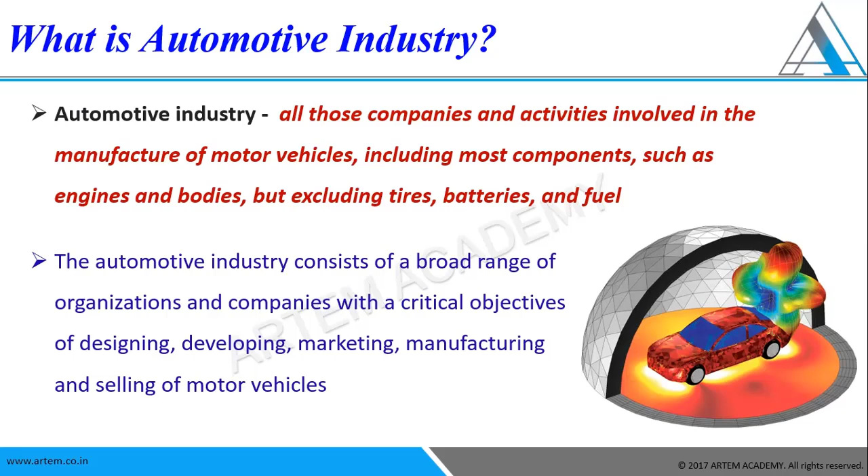Okay. So you can see here it is a broad range of organizations and companies, starting from designing, developing, that means simulation, production, marketing, sales; everything belongs to this automotive industry. We belong to design and development. If we are interested, we can be a combination of technical, marketing and manufacturing. For manufacturing, nowadays the process is done not through experiment but through simulation tools, which reduce our time and cost. Other than this, we have many other things in simulation, design, marketing, maintenance and services.

So in more sense, you can see it is a unique and challenging career for whoever is passionate about it, regardless of skill level. That means according to our skill and capability, we can choose where to go. As the automotive field has a broad range of simulations and design, according to our skill level and our interest, we have to go for the specific part or stream.

The picture you can see here talks about aerodynamics, design, simulation. In simulation, again, we have many things like strength, durability, safety, and how it is acting. So it is a combination of many parts. As mechanical engineers, we'll focus on 80% or 90% of the parts. The other 10% is for the glasses or the external architectural purpose. And these days we are also getting AI-built systems in the car. That portion is related to software combined with mechanical inputs, so we can go there as well.

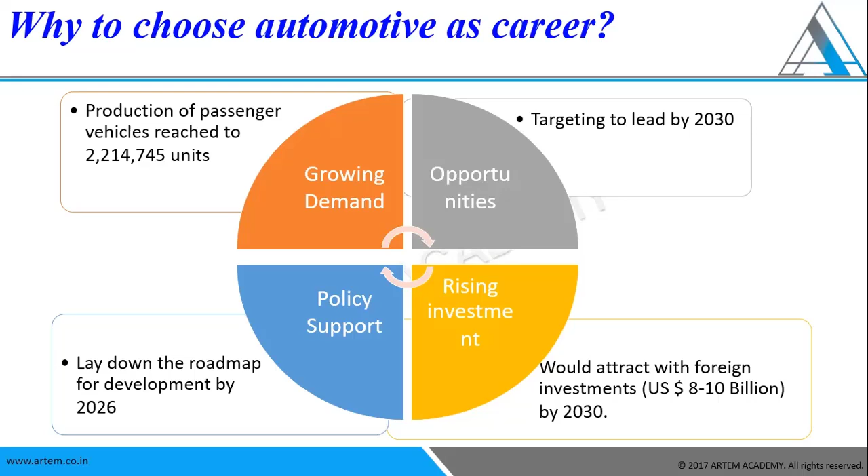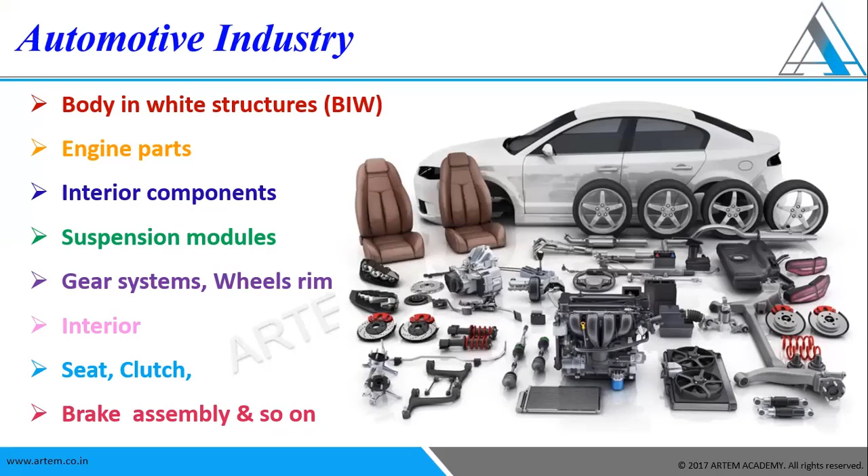In the same way, interiors, other than foam or something, even those seat structures sit on a frame. That frame will carry the load, not the foam or the seat, right? We have to design that frame according to the weight we are putting on the seat and on the back, and how the system should be designed. And the seat, clutch, brake assembly, and so on. So many components are there. Individually also we'll throw some light.

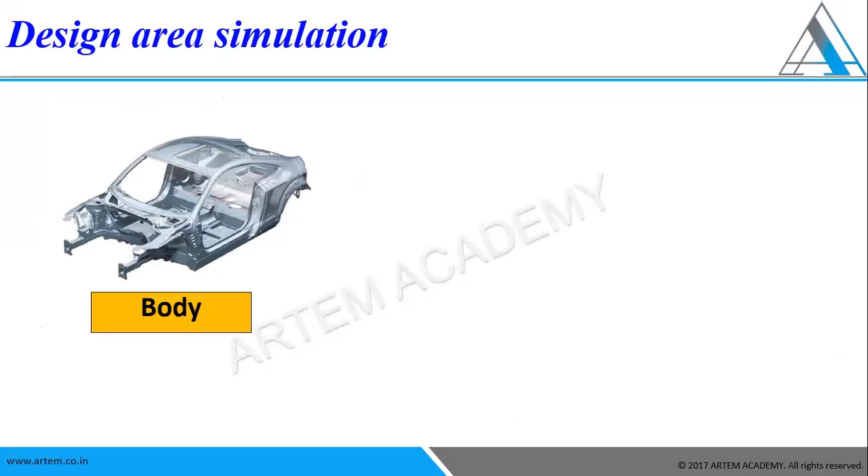Before that, we will discuss how many categories globally we need to do for any automotive industry. The major things I have noted here. We have to do the body, and then the chassis. These are the designs of the structural components, like interior. So in that again, if we take the body, about 20 to 30 sub-components will be there.

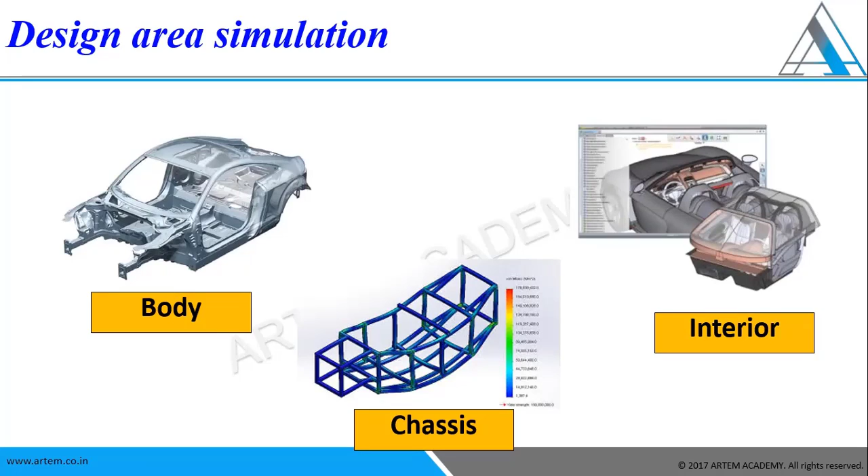Some structural examples I have given so that you will get a sense of what designs we are going to do for an automotive industry. Okay. And also in later stages, I will explain how we have to decide in which tool I have to design, and according to different analyses, which tools are available in the market and how I should go through it.

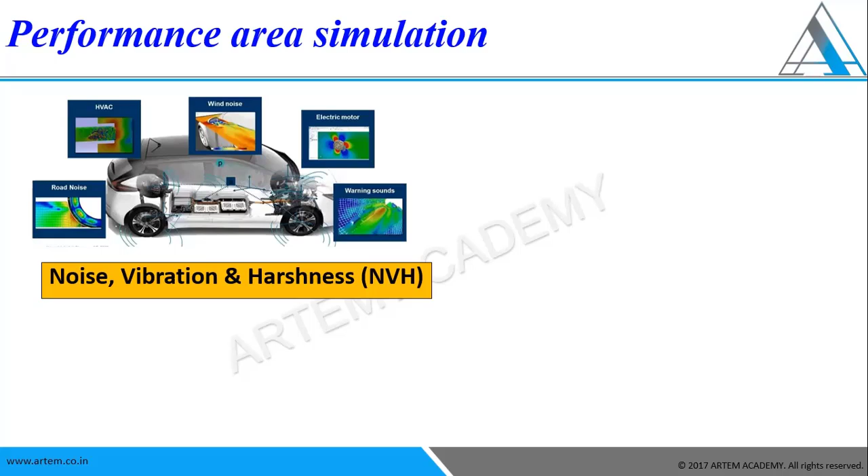Vibration because of the air, because of engine parts moving, and of weight. Different portions we are going to analyze for vibration, component wise, sub-component wise, based on the simulation, that means based on the running operating condition. Like that, we will be doing each thing; again, if you take each subject, it is a vast ocean kind of thing.

Then aerodynamics and thermal. How can we reduce drag? Any car has to move fast with less fuel consumption. That will happen by reducing the drag. If you observe sedan cars, you can reduce the drag and it will perform at higher speed. That is why we have to consider the aerodynamics and also thermal change, whether it is in cold temperatures or in high temperatures.

When we are turning a vehicle, we should observe that if both the tires are running with the same speed, the turning won't happen. For that, there should be a gear system in between the two tires, which helps to rotate or turn the system. Okay, so that is what we are going to do through vehicle dynamics.

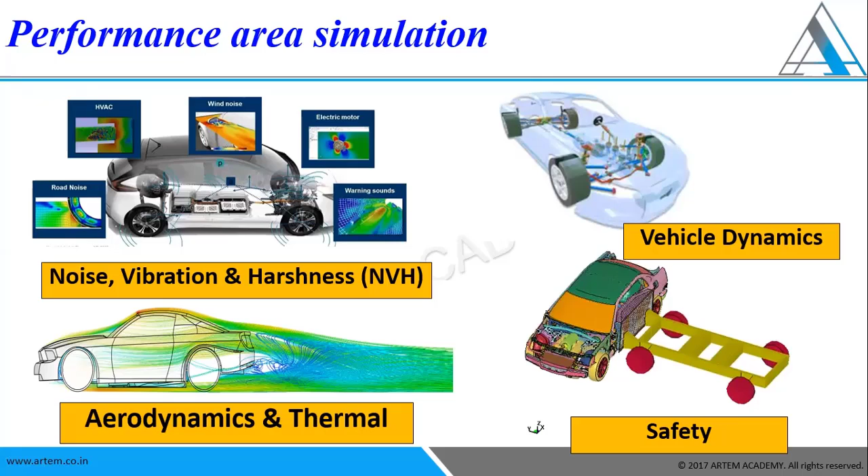Okay, these are different simulation areas we are going to address for the certification or for the manufacturing of an automotive system in terms of performance. Now let us take components based on the models. That means you can see how many models are there for a single component. If we take body in white components, that means my car body, how many subcomponents are there which get attached to form a global assembly.

And you can see for this one frame, there are about 15 to 20 components. For each and every component, we have to find the strength, durability, failure, fracture, everything before going to manufacturing. So you can see how much it got expanded. If you take one car, these many are there. Then imagine how many opportunities you will have in this automotive industry.

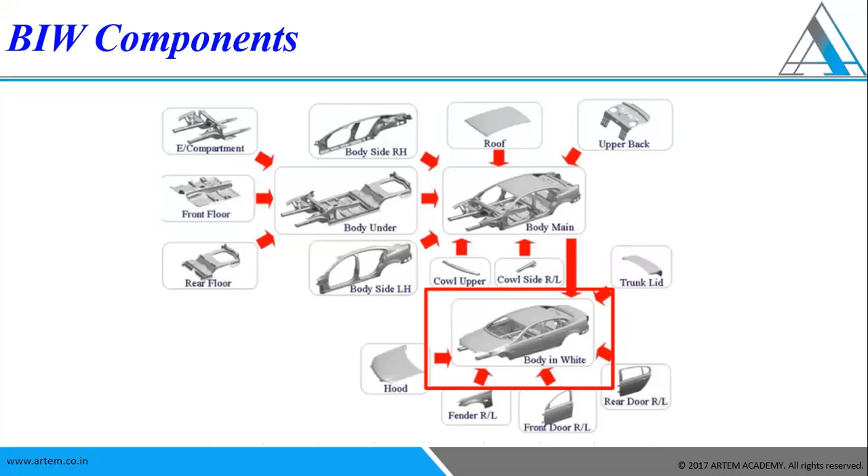Let us talk about engine parts then.

So some of the parts I'm mentioning here, like engine block, exhaust manifold, and cylinder head cover, and you also observe that some gaskets are made, that is to reduce the damping effect or to reduce the vibration in the system. So oil pan, shaft pulley, and so many small parts are there. Each need to be analyzed separately to know its strength based on the functionality.

All this we are analyzing separately, and as an assembly, we may be considering some of the components as defeatured, or for this complete assembly to run, it will take very high time and be very complex to do. That's why every time, not only in automotive but for any industry, we will be considering this part-wise, and also the complete assembly, how the functionality is working.

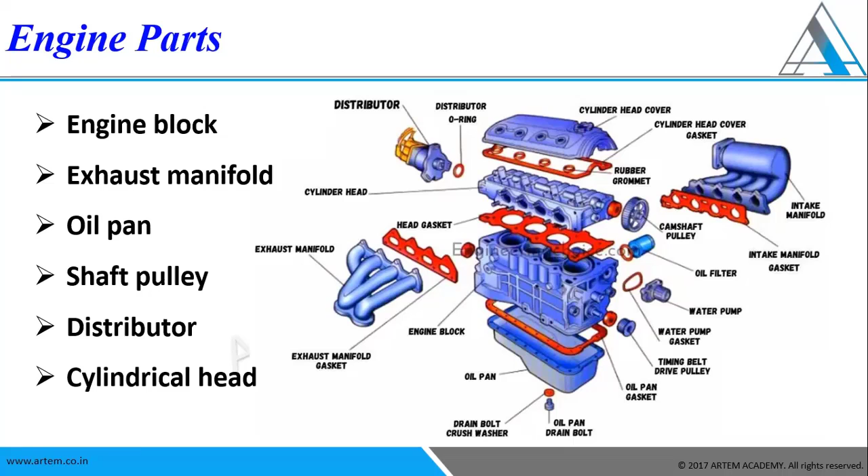Okay, here also one example I'm going to give. If we take the engine block, we need to make at least 7 to 8 types of analysis for the engine block. When I'm going to explain about the types of analysis, at that time I'll take the same example and explain to you why we need to do different types of analysis for a single portion, what is the necessity of it.

Then structural components other than this car body are the engine. We have these many structural components. These parts are mentioned and given to you so that it will give a good insight into how much the automotive industry is expanded. For each part, at least a team will be working from design to manufacturing, from concept design to manufacturing in other sense.

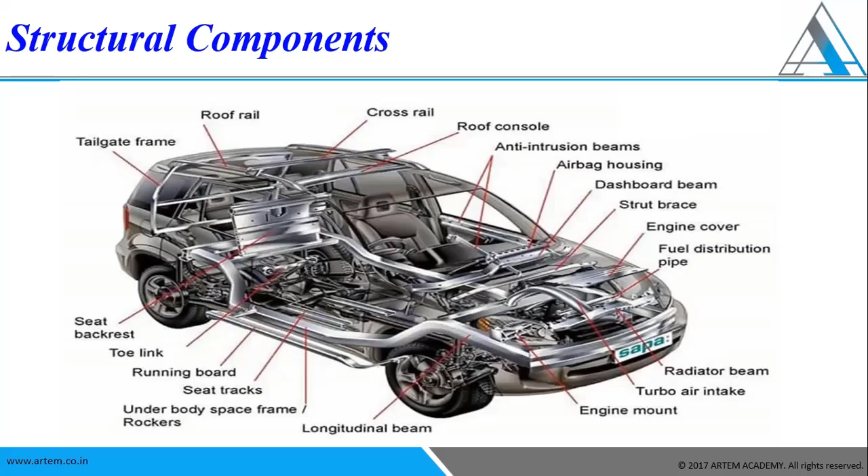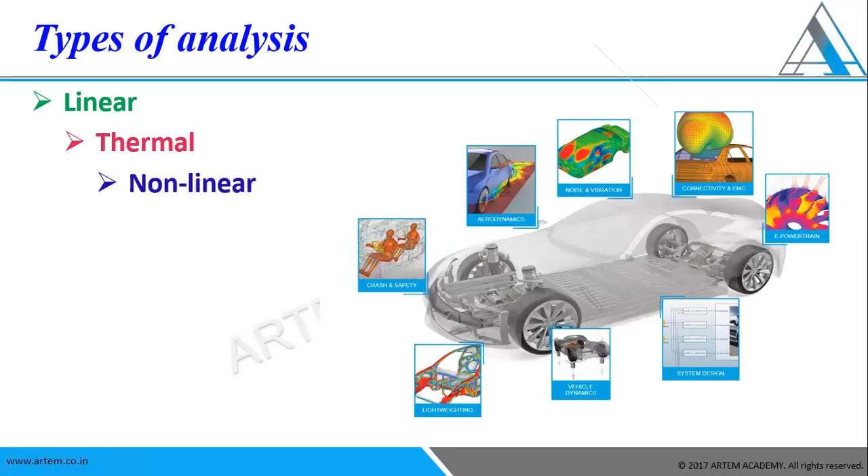For all these parts, what are the types of analysis we are going to do? Here we'll see. Some of the types I'm mentioning here. Types of analysis. Linear, that is the basic analysis to carry forward any part. And then we have these many types. I'm giving a rough idea of contact, aerodynamics, and so many other things. Thermal, nonlinear, fatigue, durability, stiffness, optimization, crash, vibration. So it doesn't mean that for each and every part, all types we are going to do. Only some I have mentioned here. Still, there are so many other types also.

So if you take a component like engine block, we need to do linear analysis. Since it is an engine block which will be having high pressures and temperatures, we are going to do thermal analysis. Then according to the speed, according to the running time, the load in the engine block, that means temperatures, pressures, will vary, right? So for that, we are going to do fatigue analysis, transient analysis, and to know how stiff it is, we have to do stiffness analysis. To optimize the part for a new material or for manufacturing, we have to do that as well.

And since it is having high temperatures and pressures, if it is crossing beyond the yield, what will happen? So we have to do nonlinear also for that. So for one engine block, which is a part of the engine, we are doing about 7 to 8 kinds of analysis for the certification. Why do we have to do it? To explain this, I'll give a simple example. Everybody might have done UTM, right? Universal testing machine, where we are going to extract the stress-strain curve.

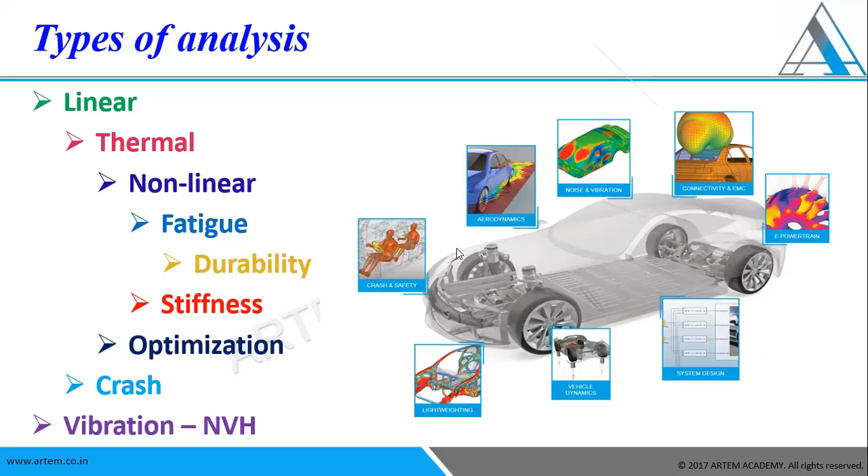I think it's clear enough. Then what are the steps for simulation? Irrespective of any type of analysis, these are the steps. We have to do CAD, that is design, and then mesh, that is nothing but meshing tool or any simulation tool, and then assembly. Boundary conditions we have to apply as per the component and as per the functionality of the component, how we are making. Okay, compute the results, analyze and test it.

Okay, so these are the steps. Irrespective of any type of analysis, these are the steps. But based on the type of analysis, geometry will vary to a little extent. Mesh factors will be different according to the type of analysis. For example, for static condition, one type of mesh I need. For modal analysis, where we are going to analyze the vibrations and all those things, I need another type.

If it is a single component of an assembly, or if we are making bigger components like a car, a complete vehicle, then so much we are going to assume, like the thick parts or straight parts we will make as 1D elements, sheet elements, and also 3D for some parts. It depends on the structure we are considering and type of analysis. The factors will vary, but the process will remain the same.

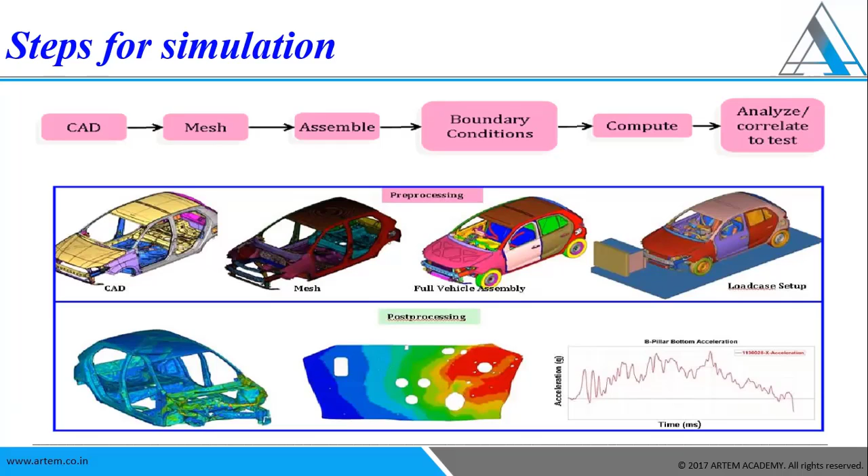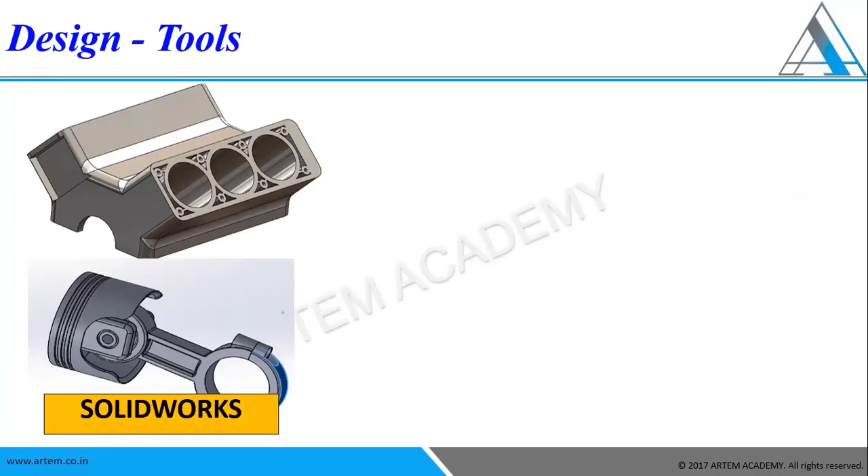Okay. Then now coming to the actual scenario, generally in industries, what are the tools they will be using for different types of designing or simulation based on the analysis type and design? So you can see for design, majorly in any automobile industry, they will use SolidWorks mostly, or they'll go for CATIA. Now you may get a doubt on what basis they are going to decide about the tool. It depends on the size of the company and the legacy of what they were using, because SolidWorks just happened to come 5 to 6 years before. Earlier they used to use CATIA only, right?

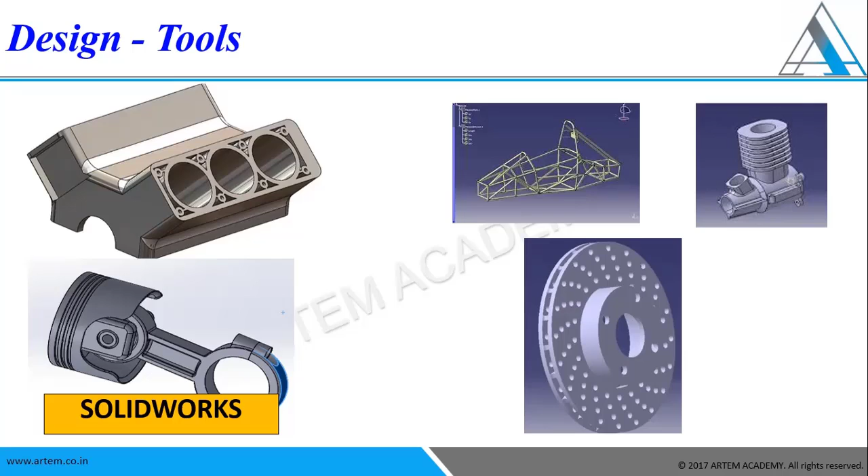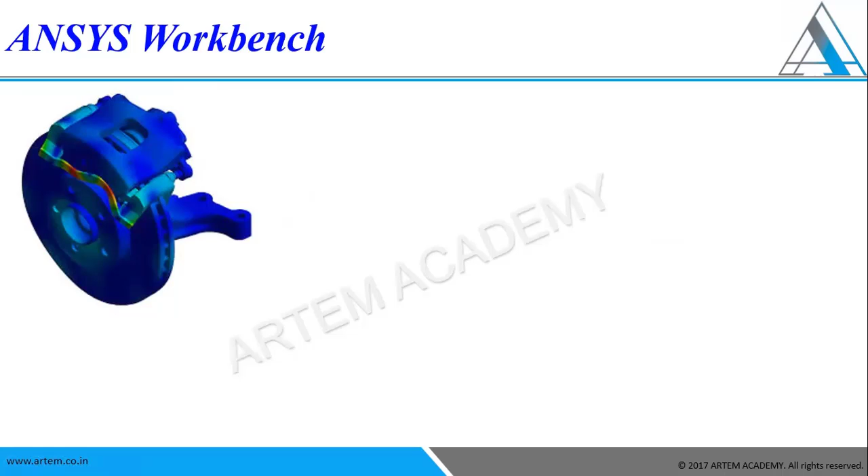And the components they were doing, and there were so many other factors, like cost factor in terms of tool, that will decide which tool to use, or sometimes the client requirement as well. Okay. We have these two tools in design. Whereas in analysis, for each kind, we have different types. So you can see ANSYS Workbench will give correct and accurate results in terms of assembly of static components. Why will we do static components? To know the strength, durability, fatigue, and fracture, and also transient analysis we can do in Workbench. That is, ANSYS Workbench will give a vast exposure of different kinds of analysis on one platform.

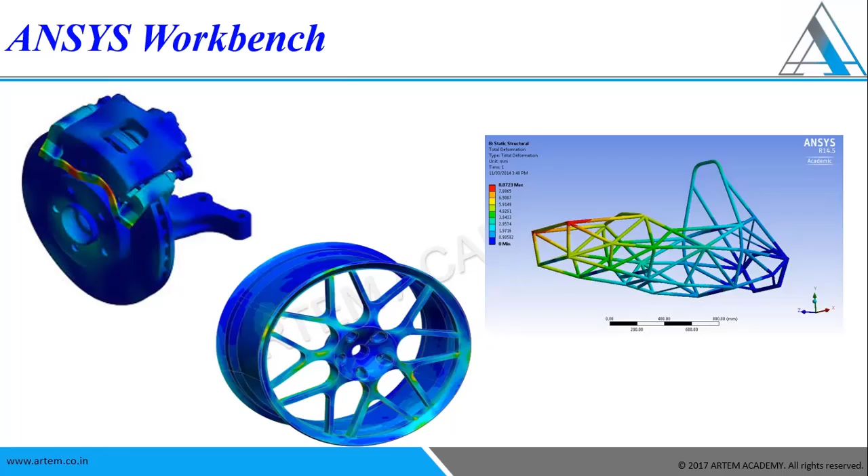Then coming to HyperMesh, it is used majorly for meshing complex complete car structures or OptiStruct simulation. You can see OptiStruct means, like cars may change, car shape may change, we have to optimize this without changing the mesh count or without changing the loads or mesh. So that is why we will go for HyperMesh, where we can do these kinds of different shape optimizations directly in OptiStruct. Okay, compared to ANSYS, this will give more accurate results and is also easier in the analysis. These kinds will be done in HyperMesh in the industries I'm talking about. You can see according to the part and the analysis we are doing, the tools are decided in the actual industries.

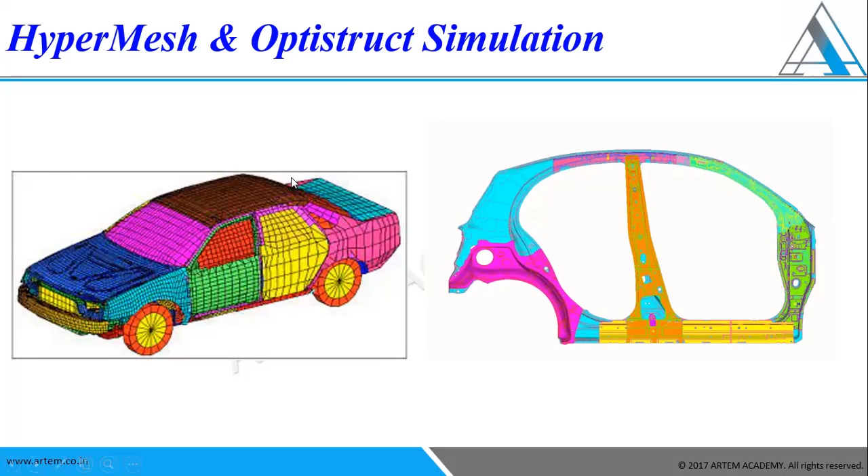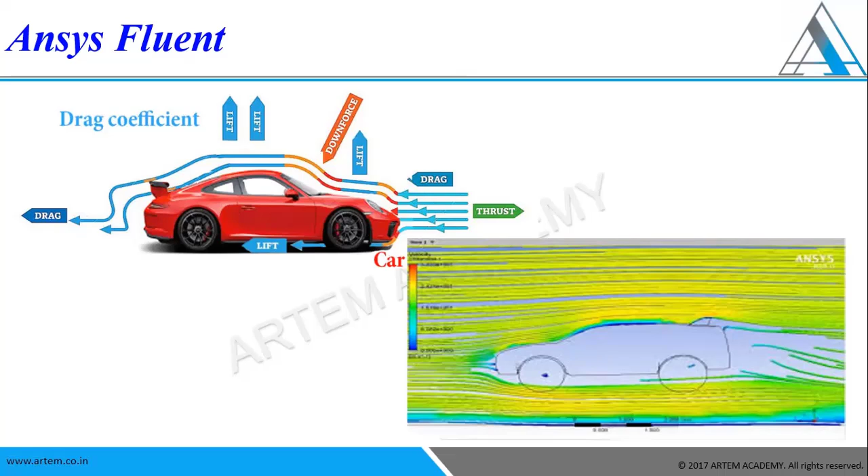Then ANSYS Fluent is used to know the efficiency or aerodynamics, where the lift, drag, and downward force, all these things are there. That means the formulation for each type of analysis is different, and each condition is different. We will be using different types of software based on the need and requirement of the analysis and the outputs of the analysis. Okay. This flow we can't do either in direct ANSYS static analysis or in HyperMesh. We have to go for Fluent, where the related theory and formulation are embedded in the tool for the calculation of these flow loads.

Then LS-DYNA or PAM crash are used for crash analysis. You can see different types of crash analysis here. So it is hitting a pole, or hitting a divider. That means we can say that whatever analysis we had before, all those belong to static condition. Static condition doesn't depend on time, and that is called implicit analysis, whereas whatever depends on time is called explicit analysis.

For explicit analysis, the most widely used systems are LS-DYNA or PAM crash. Observe one thing, these are the simulation tools. To do meshing, again we will be using Hypermesh only, either to run the model in LS-DYNA or in PAM. Okay, so meshing will be done in Hypermesh, then bring those parameters and do the simulation in these explicit softwares. Explicit softwares are purely time dependent.

For example, you can see until the car touches the pole, there won't be any variation in the car. In a fraction of a second, the car will fail so much and the airbag gets released. So in a fraction of a second, it varies a lot. So that's why this comes under what? Performance safety type of analysis, where we are doing this kind of impact or crash. Okay, so is it clear?

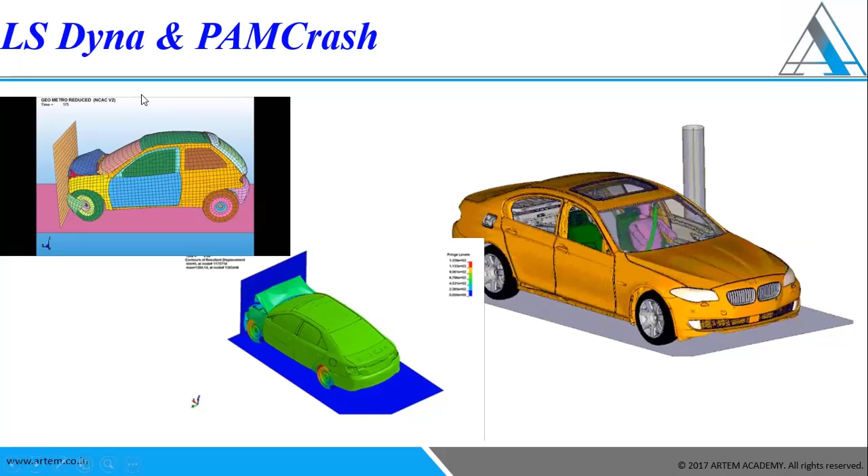These are different types of analysis and different components which we will be designing and simulating, where it depends on the company standards and also the facilities available in the tool to explore. So you can see we have discussed so many components and different types of analysis. For one vehicle, how many parts will we have? At minimum, if we take around 1000 or 1500 parts, how many vehicle models are there? How many things are there?

Then you can see how much expansion or how many job opportunities we will have in the automotive industry. Okay, we have huge job opportunities. First, we have to fix our niche, our interest. You might have so many doubts like which tool I have to learn first, what I will get from learning, why I'm not getting a job. To clear all these confusions, we are conducting these webinars so that they give good insights, like these many components are there.

So in the mechanical industry, there is a huge requirement for candidates and there are huge opportunities. But we have to make ourselves industry ready. One drawback in our system is we focus completely on the BTech education system without learning the tools. Then after learning the tools, we don't know how to correlate the actual subject to the tools. That is the major drawback we are all facing. To avoid that, whatever we learn in BTech should be linked to the tool. Only then can we improve ourselves, if we understand the correlation and how it actually goes into the physics. Okay, am I right?